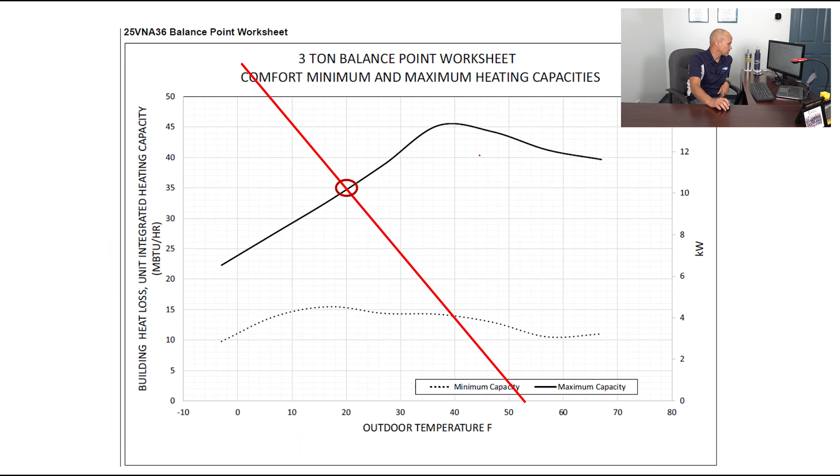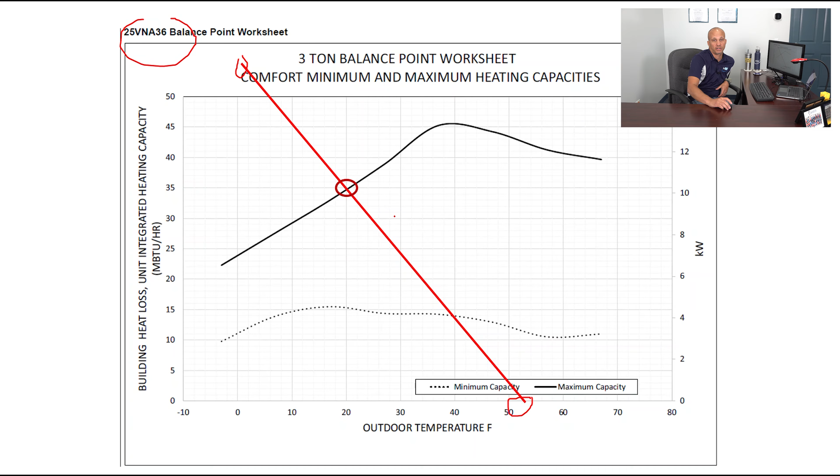So if I picked the exact same house and gave it a different heat pump model, now I'm working with something totally different, but it's the same house - 55,000 BTUs on a 0-degree day. On a 52-degree day, I don't need any heat. For this one, it's a 20-degree thermal balance point instead of 30 degrees. And one more example here: for this one, I'm at a 26-degree balance point.

And I could have also upsized and put a 4-ton instead of a 3-ton in, and then my balance point would have been 17 degrees. So it depends on the model of the heat pump, the tonnage of the heat pump within that model, and the load of the house. That'll determine what your thermal balance point is and when you need to have some other heater kick on.

Now, if you have an all-electric system, meaning your auxiliary heat is electric resistance heat, the heat pump is pretty much always more efficient than electric resistance heat. So you'll never shut the heat pump off. Even when I get down to that thermal balance point, I keep running the heat pump and I add the electric heat as a second stage to help it out, right?

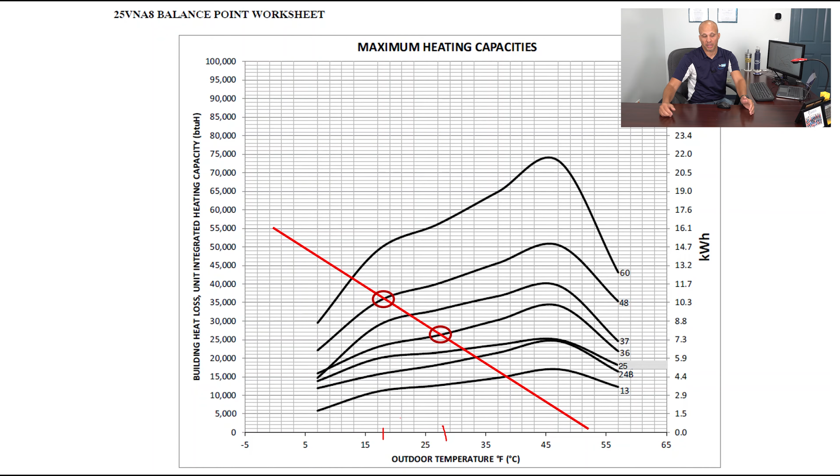If I have something other than electric heat as my auxiliary heat source, that's when things get more complicated, because now I'm not paying for electric and electric - I'm paying for electric and gas, or electric and propane, or electric and whatever other fuel you have. So that becomes a little bit more challenging to calculate. We call that the economic balance point.

Just to give you one more example on that - that's the same graph we saw a minute ago, but I'm taking the table data from another heat pump, an inverter in this case, and overlaying that on the graph just so you can see, hey, this is what happens when I have this model versus this model. And it makes a difference on that balance point, all right?

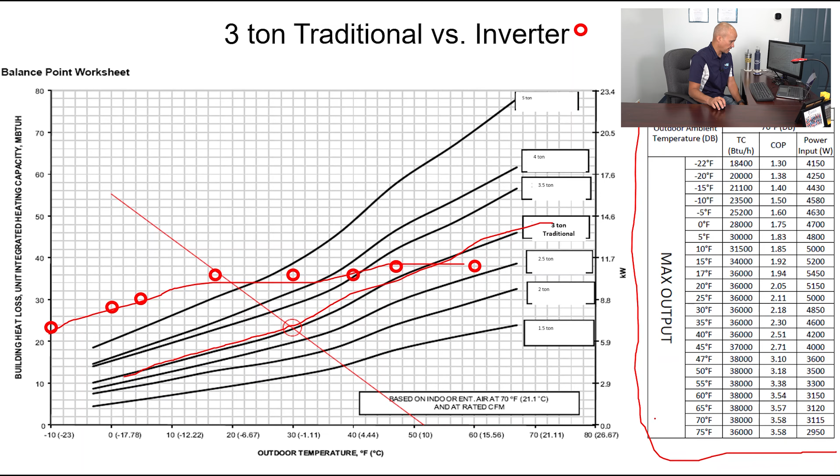To find the economic balance point, I need to know the cost of gas and the cost of electric, right? So to do that, what I personally do, since I live in one of the communities that would be the same place that my company works in, is I look at my own bills. So I'm gonna use 2024, since this is the last complete year that I had.

It's 2025 today. For my gas, I was paying 94 cents a therm. Now if you look at my bill, it says I'm paying like 38 or 40 cents a therm. But then I have distribution and delivery charges on top of my supply charges, and I have taxes and fees and all these different things. So what I do, because I'm a nerd, is I take my bill cost each month and divide it by the total therms, so I get dollars per therm.

So 133 divided by 172 is 77 cents a therm, right? For the whole entire year, I paid 94 cents a therm. I do the same thing for electric. My electric rate is 6.69 cents a kilowatt hour, but once I factor in my delivery charges, taxes, and fees and everything, I'm paying 17.9 - more than double. So you have to really do it that way to know what you're actually paying. So 94 cents and 17.9.

For discussion purposes, I'm gonna show you in a second what happened in 2022. My gas was $1.31 and my electric was 13 cents. It was kind of flipped from what it is last year. So that does in fact make a difference.

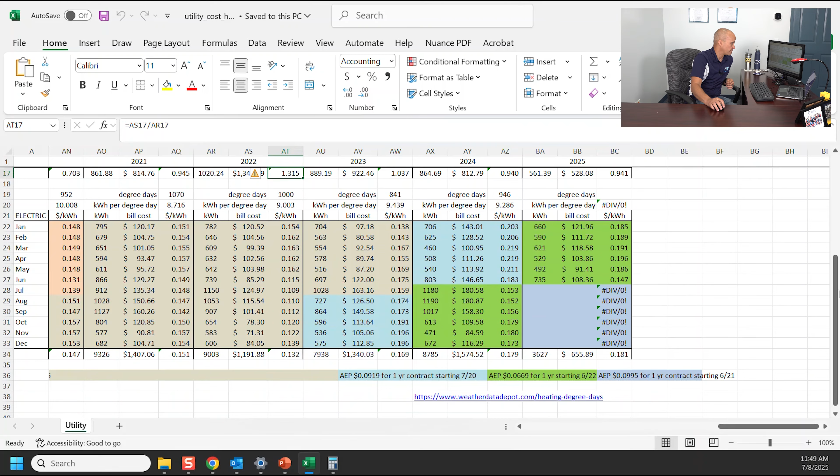So if I go to that same chart that we had a second ago, I get this one from Minnesota. I actually have to stop using it because I pay more now. But if I was only paying 16 cents instead of 18, and I had 90 some cents for my gas, that would be a 60-degree economic balance point.

Meaning when it's above 60 degrees, you would use the heat pump, and below 60 degrees, you'd use your gas furnace in this case, which basically means never use the heat pump. When your electric rates are that high and your gas rates are that low, there's no reason to run the heat pump at all. Just stop using it. Now, if your rates are different, then it's different math. Or if you've got solar panels or something, different math. But for this straight up gas versus electric example, that would be the case.

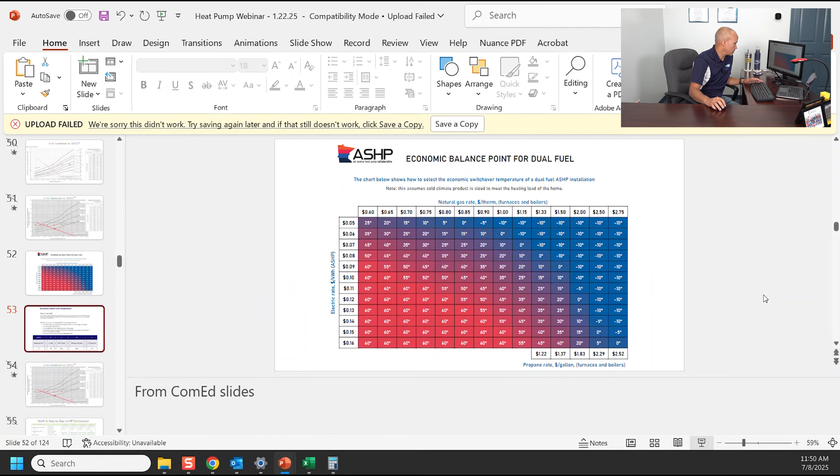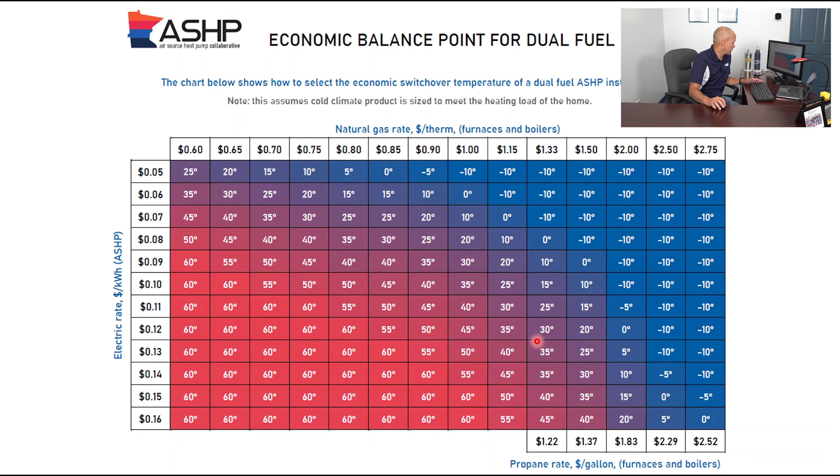Now, if I go back to that other example, 2022, I was at $1.31 and 13.2 cents. So $1.31, I'm over here, let's call it $1.33 and 13 cents. 35 degrees is my cutoff point. That means above 35 degrees outdoor air temperature, I would run the heat pump, and below 35, I would run the gas furnace.

So it does matter what your utility rates are. That's the biggest factor in the economic balance point. The efficiency of the equipment, not so much. For thermal balance point, the efficiency of the equipment is a big deal, as is the load of the house, but economic balance point is mainly utility rates.

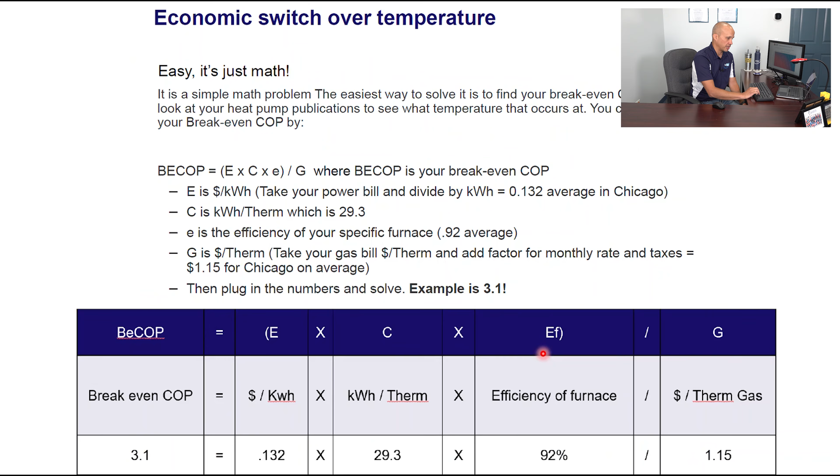If you want to be more specifically detailed about calculating this, as opposed to just pulling up a random chart from Minnesota, you can use this formula here. I got my calculator ready. So in this example, you're going to calculate the COP, coefficient of performance, in the heating mode, at which you are the economic break-even point.

So what's my utility rate? This example was 13 cents for electric, and I was $1.15 for gas, and my furnace was 92% efficient. So the formula is the price you pay for electricity, multiplied by this conversion factor from electricity to gas, multiplied by the efficiency of your furnace, divided by your gas rate.

And that came out to be a COP of 3.1. If I go look at a heat pump, for example, the one in this table right here, 3.1 would have meant a 35-degree cutoff point. Above 35, run the heat pump. Below 35, run the gas furnace.

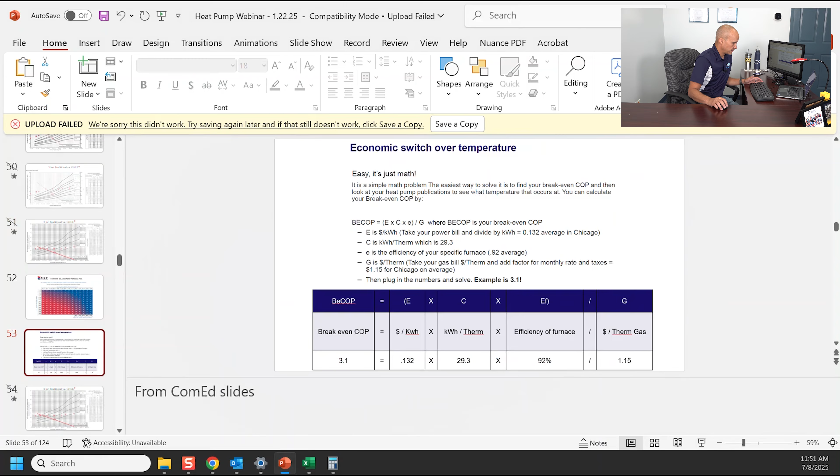If I recalculate that with my current costs, right? So if you recall, I was at 18 cents for electric, times the 29.3 unit conversion, multiplied by -- let's give the benefit of the doubt, let's say I have an 80% furnace, like the legal worst furnace I could possibly install. And my gas was 92 cents, 0.92.

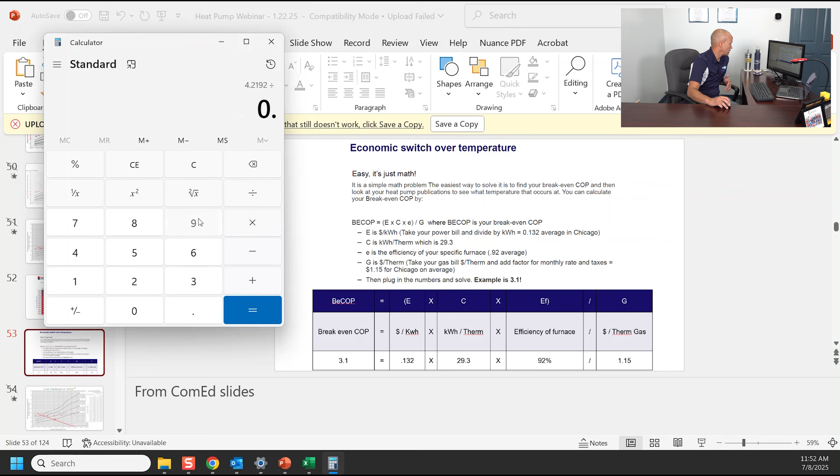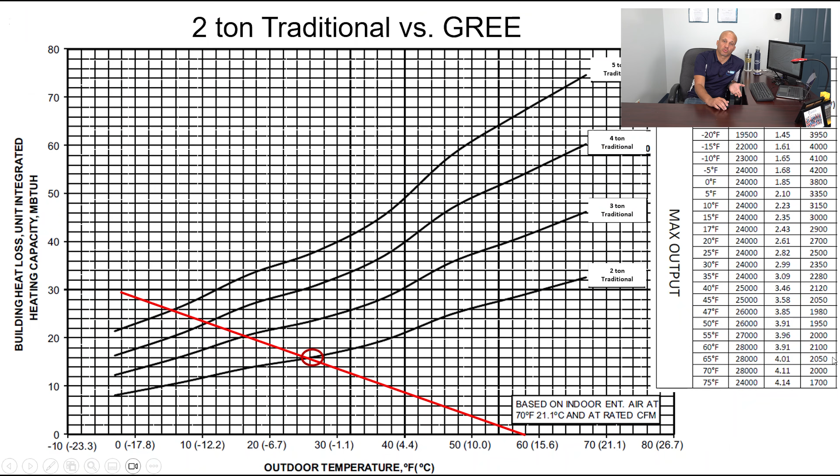4.58 COP would be my balance point. 4.58 puts me at like 80 degrees. In other words, don't turn the heat pump on this year at all. It makes no sense whatsoever. So you can calculate that on a case-by-case basis to decide what you want to do with that.

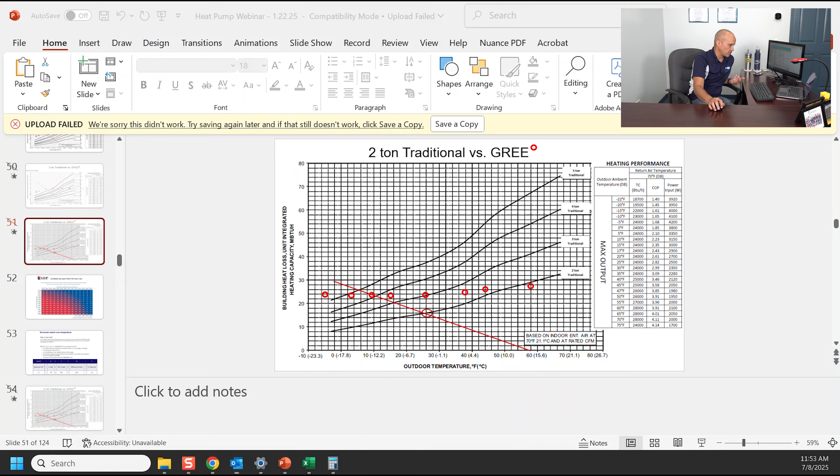Where we live in Northern Illinois, ComEd and Nicor, 2008 and 2022 were great years to run a heat pump and turn your furnace off. All the other years, the furnace has pretty much been the winner. But hopefully that helps you calculate these things, and you can program that changeover point into your thermostats.